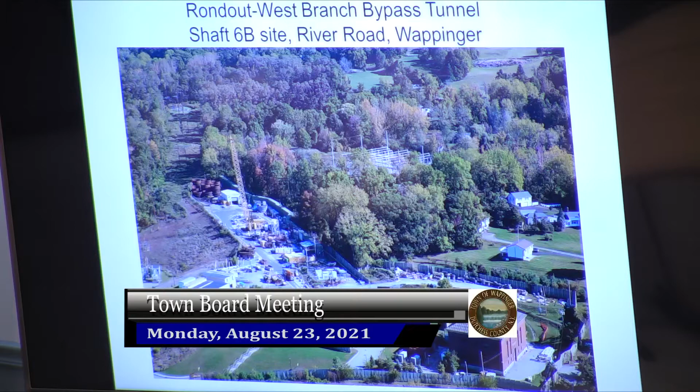So what we're going to talk about today is an update on the progress, our upcoming work schedule, both prior to the shutdown and during the shutdown of the aqueduct, which is for us two totally separate things, but probably for you guys not too much difference. Status on the replacement of the noise blankets around the perimeter fencing, and any open discussion or questions that you all may have. Next slide.

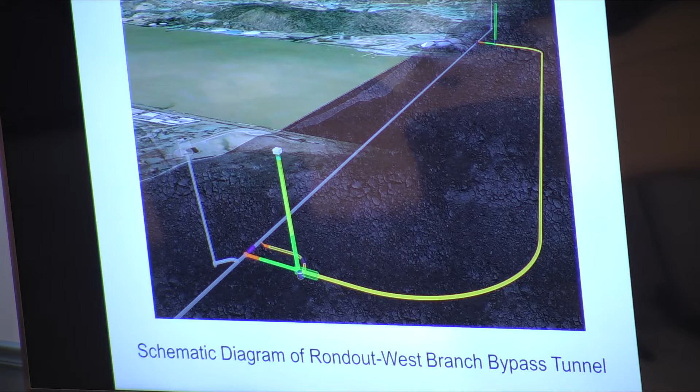This is really just a schematic of the tunnel. So the pinkish gray, sorry, I'm colorblind, I don't deal well with these colors. That's the existing aqueduct. We built the new shaft on the Newburgh side and the new shaft on the Wappinger side starting in 2013 and finishing in April of 2016. And in June of 2016, our second contract came in and started excavating the tunnel, 12,500 feet long, which is roughly 2.5 miles.

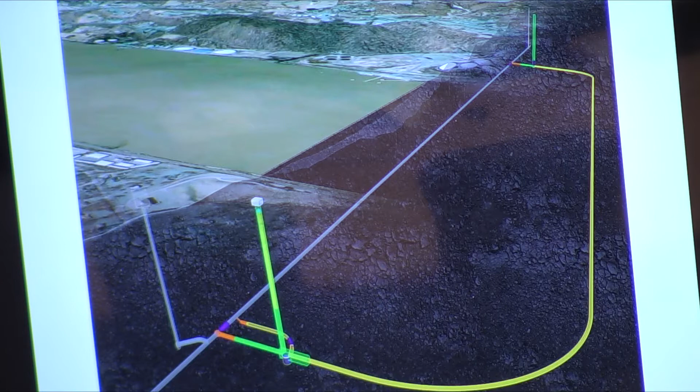And there's a secondary drainage tunnel. You'll see that little curved section on the Wappinger side here. That allows us to drain water from the existing section of the aqueduct once we break through, to collect the infiltration water that we're expecting to have from the leaking area of the aqueduct. Next slide.

So basically, it's a state-of-the-art machine. It costs like $30 million, and basically allowed us to penetrate through the faulted areas that were on the west side of the Hudson River, and not have that water infiltrate into the tunnel and cause any problems, which is part of what happened back in the 1940s when they excavated the existing aqueduct.

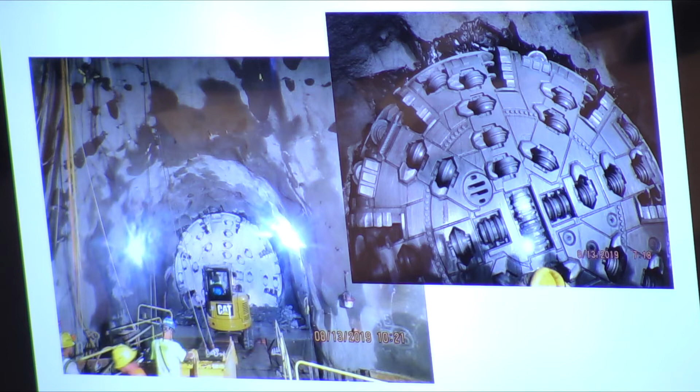These are some photos of taking the machine out. Again, we have to take it out in pieces because it's so big. The cutter head, I think, came out in 5 pieces, and then the main tin can part, which is the shield, came out in 4 separate pieces. And then that last bottom right there is part of the backup trailing gear again, which powers all of the components and the utilities that run the machine. So the machine basically thrusts itself forward, and it tows behind it on rails this 400 feet of backup gear. Next slide.

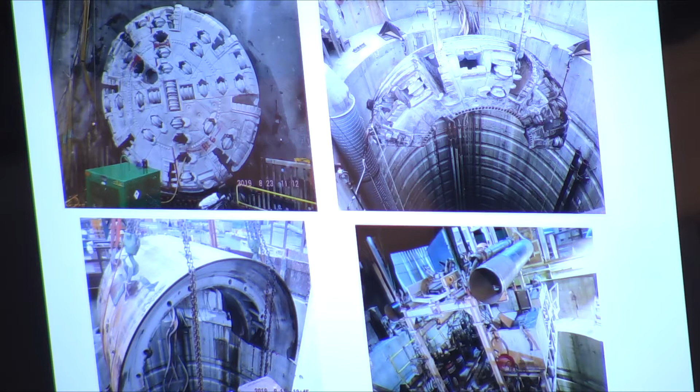These are some other photos of the steel interliner. Again, this tunnel was built differently than we usually build our tunnels because of the faulted rock zone on the west side of the river. There's 9,000 feet, which is roughly 75% of the tunnel, lined with a 1-inch thick steel pipe that's 16 feet in diameter. These sections that the contractor brought down were 40 foot at a time. They weighed almost 100,000 pounds.

And there were 230 of those pieces sent into the tunnel: weld the joint, send the next piece in, weld the joint, send the next piece in, weld the joint. So it's a very repetitive process, but they worked through this. They had a great setup for getting all the preparation done, and they were able to send the pieces down and get them welded relatively quickly. Next slide.

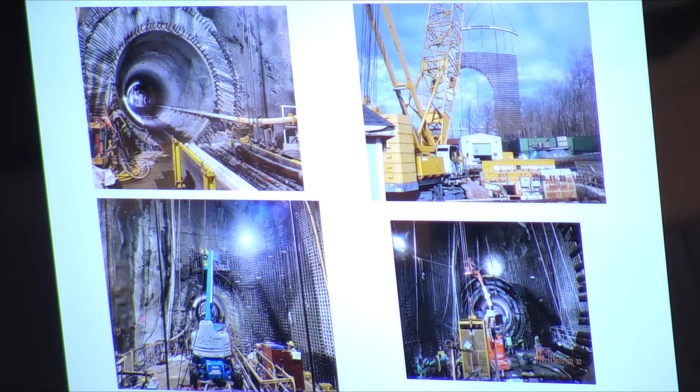Next step here was to pour the concrete on our way coming up the shaft that met up with the existing shaft that was built in 2013 to 2016, and that was about 50 feet, but it was mostly the transition area and the shaft. Again, you can see all the reinforcement that goes on there. Very strong structure at the end of the day. Next slide.

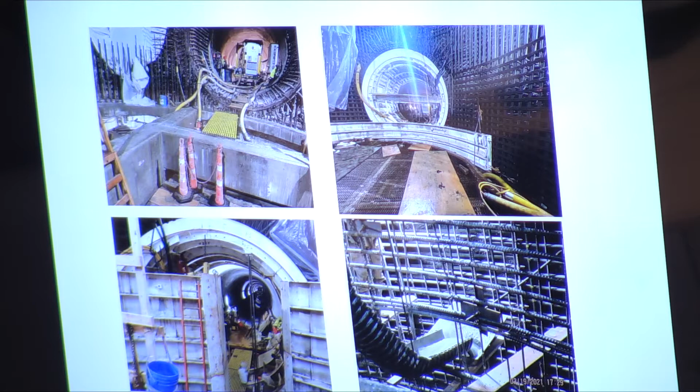This is our access pipe. This was the last step that we're coming into right now. So the shaft is 700 feet deep. The top 200 feet of the shaft now has an 18-foot access pipe that will allow us to go down and access the tunnel in a way that allows the tunnel to also be watertight.

So this access pipe comes all the way up to the surface. It has a huge 2-inch thick conical cap on it that's 8-foot diameter, and it transfers into 18 feet. And then that pipe is 1.5 inches thick all the way down. And that was our last step. We just finished backfilling that last week.

So we're about 20 feet down from the surface right now, and we're going to start building what we call the access chamber. So now the pipe penetrates up to the surface, and it's going to get a big, huge elliptical cap on it. So that allows us now, when we shut the aqueduct off, for the aqueduct to be watertight.

Once we break through into the existing aqueduct, if something happens and we have to turn both aqueducts on at the same time, this one is already set up to be watertight. That was part of the planning that we did over the last 10 to 12 years prior to really getting a lot of this work started. Next slide.

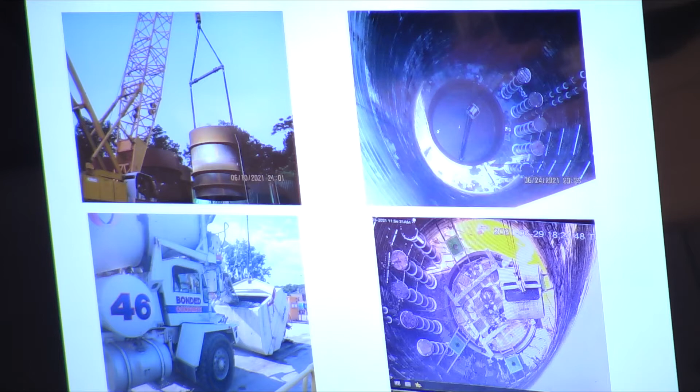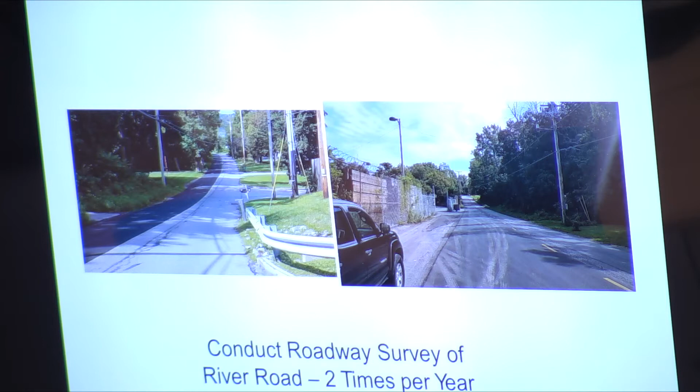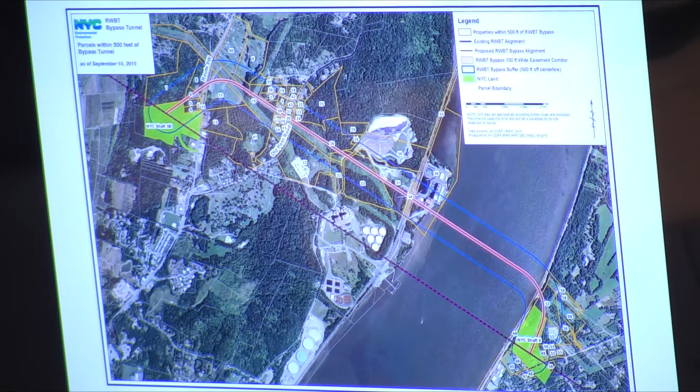Next slide. This is a map of the entire project, Newburgh and Wappinger, of all the well monitoring that we do. I think there's 14 that are on the Wappinger side off the top of my head. I believe a couple people have opted out of the in-house monitoring that we've done, but we're still doing remote monitoring and taking basically piezometer readings of the water levels in people's wells in and around the area of the site there.

Next slide. So upcoming work, I broke this down into work that we have to do prior to the shutdown of the aqueduct, which is going to be October of next year. So we're going to finish excavating for the access chamber, which is a 50-foot by 50-foot by 35-foot deep chamber, basically where the shaft cap is and all the access and utilities. It's going to be buried underground, so you won't see it at the end of the day. But it's, again, a big, heavy concrete structure.

We're installing a 30-inch drain line from the new shaft to the existing brick structure that's along the street. That will allow us to collect and pump out the infiltration water, as I was saying earlier. Right. The section of aqueduct is going to be abandoned. Once we break into the aqueduct, that water has to be controlled and it has to be pumped out. So that 30-inch drain line will allow us to pump it from the new shaft to the existing shaft and then out to the river. And we have a specific SPDES permit for that from DEC. It's already set and ready to go.

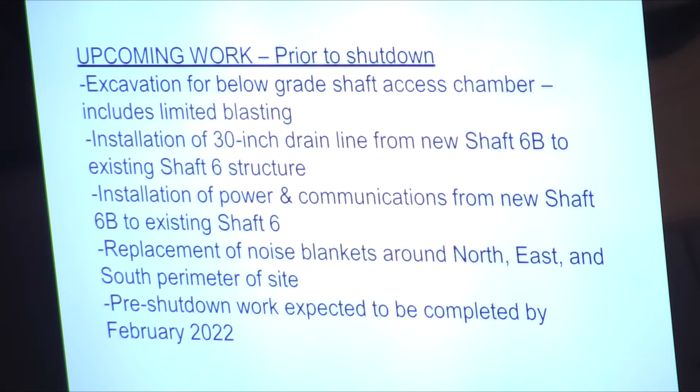Installation of power and communications from the new shaft structure to the existing shaft structure. That just allows us to make sure we have everything running and communicating with the existing system. And replacement of the noise blankets around the north, the east, and the south perimeters of the fencing area on the site. And we expect all of this work to be done by late January, early February of next year.

Have you seen the noise blankets lately? We have had an issue with getting the noise blankets reinstalled. Have you seen them? I have, they're on the site. And you saw the condition they're in? Yes, they have mold on them. They're black for the most part. They're black, yes. Yes, so we've had that mold tested. It's not hazardous at all. We had it tested.

Can I see a copy of that report, please? Yes, absolutely. Thank you. We have a contractor on board. They were supposed to start today, actually, but it was canceled with the rain. So they're starting this week on the removal and the replacement of that curtain. Thank you. Next slide. Okay, so the shutdown is basically we're dewatering the 45-mile-long Delaware Aqueduct from, again, the Wawarsing area to Carmel.

220 million gallons of water, something like that. So that'll be the first thing we do. That'll take about 3 weeks.

We will go in and excavate the last 100 feet of tunnel between our existing aqueduct and our new bypass tunnel. We'll be blasting for approximately 5 weeks. We recently wrote a letter to the town requesting that we extend the blast hours till 8 p.m., which was approved, I want to say, 2 months ago, somewhere around there. We're going to pump the infiltration water to the Hudson River through our existing chamber and stilling basin.

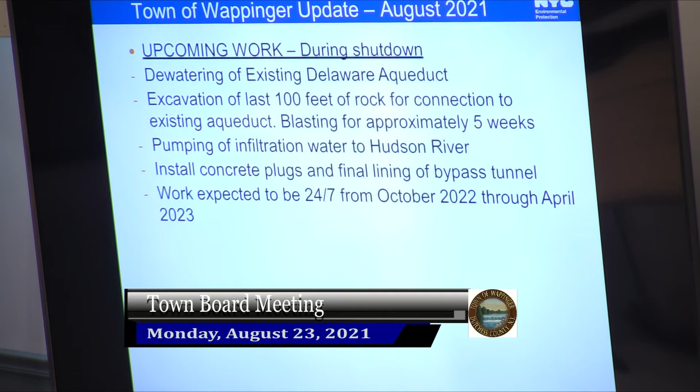It's going to be concreted in on two ends, so that's going to act as like a plug, or they call it a thrust block. So as the water comes in, it's going to divert into the new section of the tunnel. Right. There's a 50-foot-long concrete block there, and it comes around to the other side, and there'll be a 50-foot-long concrete block. So you don't fill in the whole expanse? No, no. You just let the water in? It'll fill in with water.

Okay, so just again, the date was 2022 through 2024? No, the date is October 2022 through April of 2023, so roughly 6 months. And there'll be cement delivered on an ongoing basis with that? Yes, the cement probably will only be less than a month. It's only 120 feet of concrete that they have to do.

Okay. Next slide. And then the last part of the work we're doing will be the closeout work after the shutdown, where the contractor is demobilizing all of his equipment and materials, where we do the final landscaping, new fencing, the removal of those green container boxes and the noise blankets, putting up of new fencing. The new shaft and chamber structures are going to be buried underground. I think there's only a small, like 4-foot-high concrete bunker that just acts as an air vent. And right now, that work is scheduled to be completed by the end of 2023.

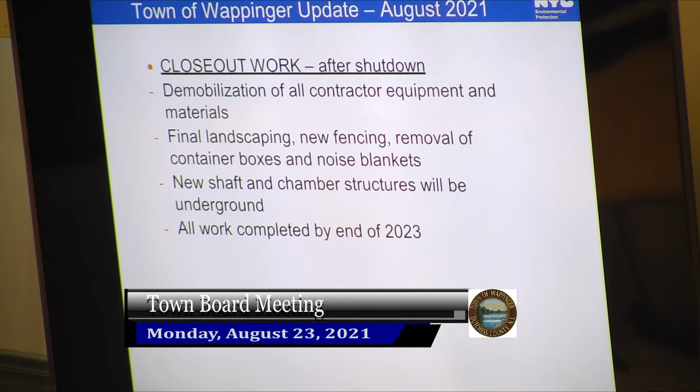However, if the city has an issue with the shutdown itself of the aqueduct, we've put contingencies in the contract to roll over that work because it's seasonal. The shutdown needs to be done between October and April simply because they can't do it in the summertime because of the water demand. So if for any reason, drought, water quality issues, the work gets rolled over to the next year, there's potential of the project ending in 2025. But right now, we're very confident that we'll have everything ready to go. And basically, the contractor schedule has them being off the site by the end of 2023. Okay. Questions?

I'd like to see the report of the roads, and I think I'd like to have your business card, please. Yep. Tim should have one. I understand the importance of this. Like I said, I was on the planning board when this was going on, and we got approved.

However, the residents of the area, the traffic, the trucks are causing a problem. Bonded trucks are going up and down that road all hours of the day. They start at 6 o'clock in the morning, and they go until like almost 11 o'clock at night. Correct. On certain occasions, yes. Okay, well, can we address that somehow? Because again, the residents' quality of life has changed immensely.